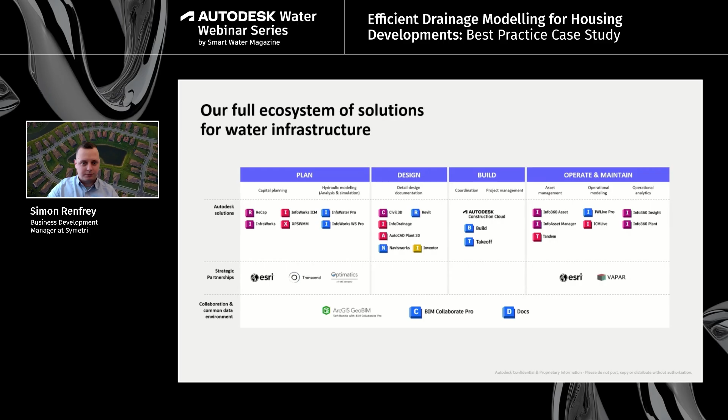So I'm now about to hand over to Brian, who's going to run through the case study and talk about how he handles challenges around having incomplete or poor quality site information, facing increasing planning and regulatory pressures, ensuring drainage designs are not overcomplicated, leading to inefficient modelling and wasted drainage design, reducing the reliance on spreadsheets with evidence-led and optimised drainage systems, ensuring accurate designs to reduce the likelihood of costly, oversized storage structures or unreliable and risk-heavy designs leading to increased flood risk, and finally, workflow and scalability challenges.

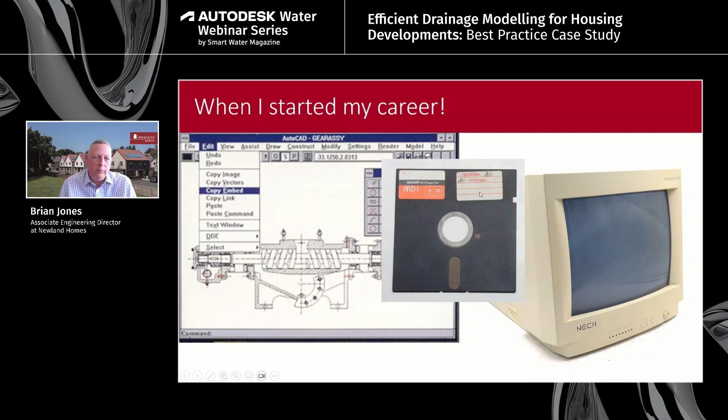So we've done that. Yeah, so when I started my career, screens were that big. AutoCAD was fairly basic, and we saved all our work on floppy disks. So I've been in the industry a while.

Newland Homes is proud to be the first house builder in the UK to sign up to the United Nations Climate Change Neutral Now pledge. We are building zero carbon homes and have been since 2022. And over those few years, we've built over 510 zero carbon homes.

Efficient drainage modelling for housing developments, best practice. If you're still using spreadsheets or struggling with overcomplicated drainage models on housing sites, with tighter sites and increasing planning pressures, inefficient drainage modelling can lead to unreliable results, inflated storage requirements, and wasted design time.

So I'm going to be covering in this seminar how we build efficient drainage models without unnecessary complexity, move beyond spreadsheets, which is where I started doing my drainage design many years ago, and how we integrate SuDS onto tight sites and avoid the pitfalls of increasing storage volumes and risk.

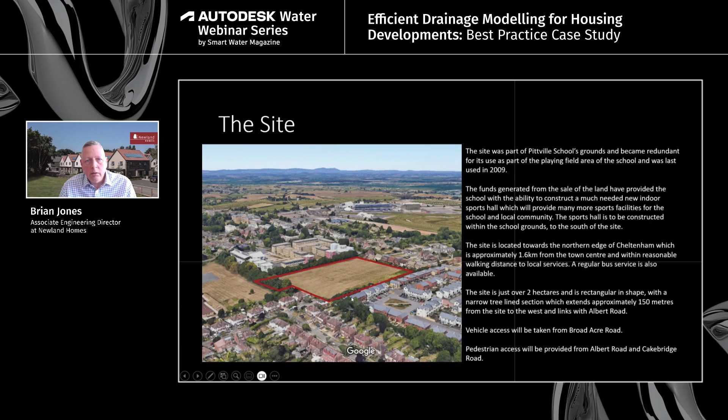So gathering the background information, part of that is getting the service record plans. So you can see from this, you've got existing sewers off to the south in what's called Cakebridge Road. There's also sewers off to the west beyond Gloucestershire College in Albert Road. And then the recently built development off to the east has got the green sewers in there, which haven't been adopted yet.

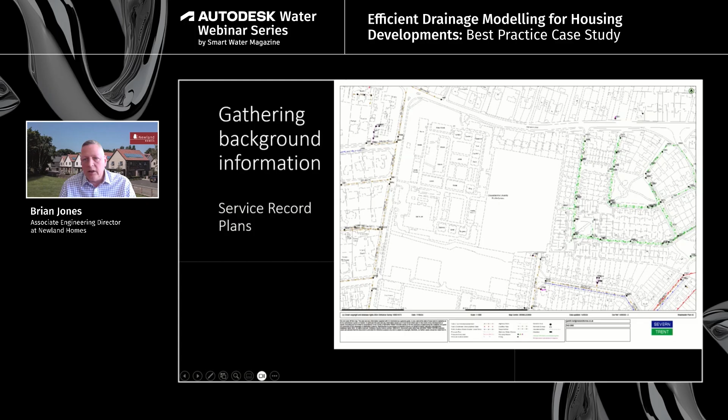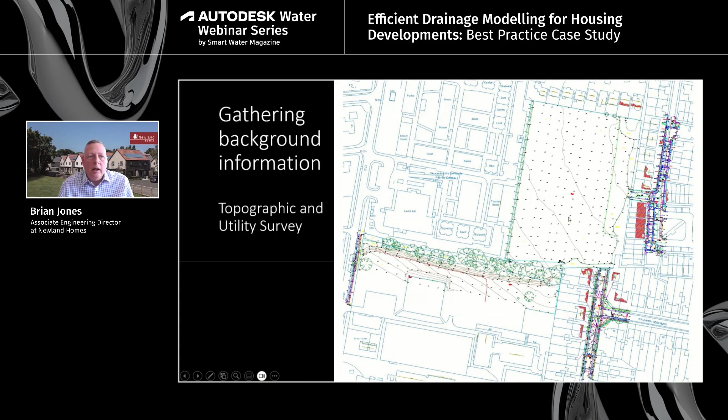So part of the information we gather is the topographic survey. That's useful in identifying utilities and existing services in detail, and the ground information. So we did percolation tests on the site, identified where the permeable soils might be, and tested at appropriate depths. Unfortunately, on this site, despite the fact there are some sands and gravels on the site, they were too dense to get a sufficient percolation rate for any permeability.

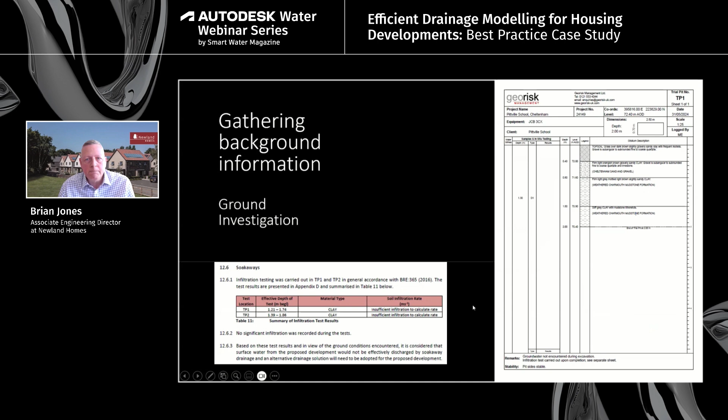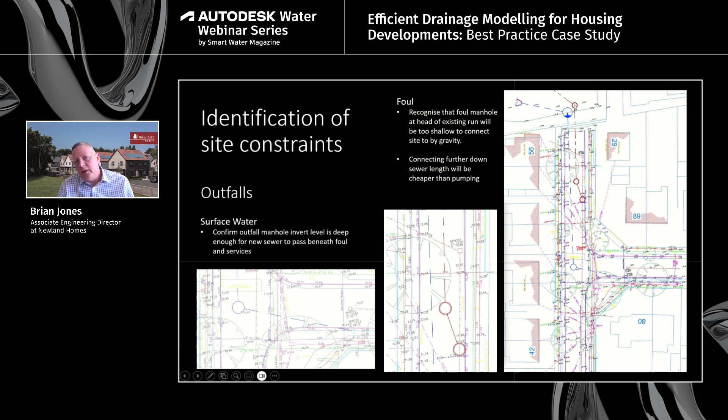So looking at the site survey in detail, we could identify the points of discharge. Looking down Cakebridge Road, there's a surface water sewer there at that point. And then a bit more detail on the left, you can see closely, there's a manhole there we can connect to. The foul drainage is slightly too shallow at the top end of the road, so we thought we'd need to take the sewer further down, so we can design both of those. And we can check that there aren't any services clashing because we've done a utility survey.

So the first part is to look at the site and establish a discharge rate into those existing sewers, assuming there aren't any capacity issues. So the first thing is to calculate the greenfield runoff rate. Now, the site was designed in April. It's not that long ago, but at the time, there were some inconsistencies between the LLFAs' approach on calculation of greenfield runoff rates: to use the site area or the impermeable area only.

Some LLFAs insist on just using the impermeable area, while others will let you use the total site, but insist on increasing the CV value for your calculations from 0.84 to 1, or including the green areas, the permeable areas, if you like, as an allowance in your runoff calculations. Since then, the national SuDS standards have been issued and clarified the process, using the total site area and not increasing the CV value.

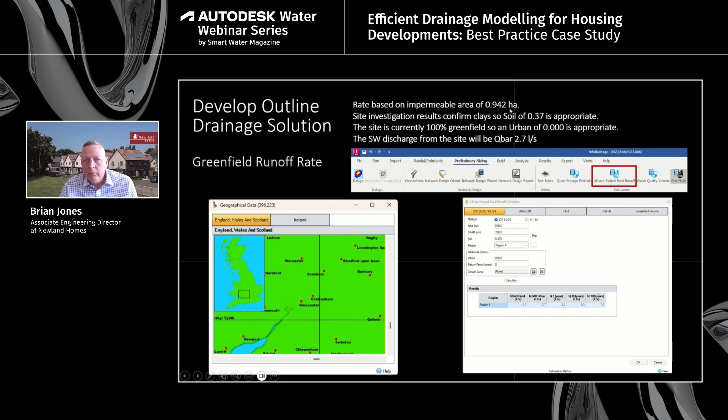You need to select the region, so make sure that the region's in the right area. But from that, you can easily calculate your rural runoff and your Q-bar value to estimate your storage. So the site area for this site was 0.942 hectares. So from there, you can do a quick storage estimate using the tab to the left.

Pop in your site area and again your discharge rate and do a quick calc, and it comes up with a range of volumes for your storage. So taking somewhere in the middle of that volume, because we know we're adding some SuDS, so this is probably going to be an overestimate of what we need. We can plot a pond or an attenuation feature that is an appropriate depth and area to give you that volume.

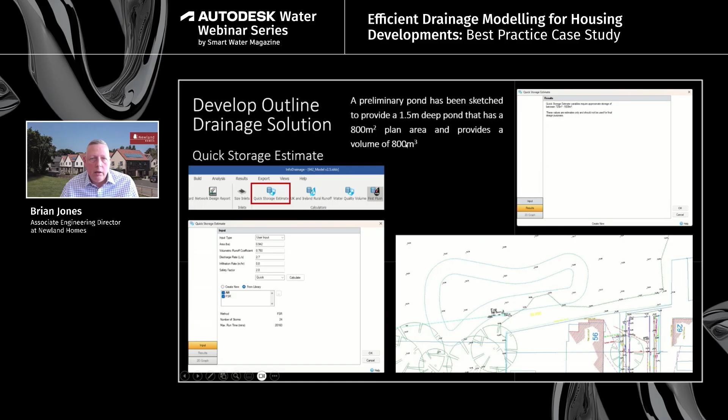So then passing that back to our architects, they came up with a layout for the site and how we were going to develop the site. As you can see, it's reasonably dense. Being in the middle of Cheltenham, there's very little open space. So the pond has been squeezed in to the bottom. Lots of houses running around a road system. That leaves very few options for SuDS.

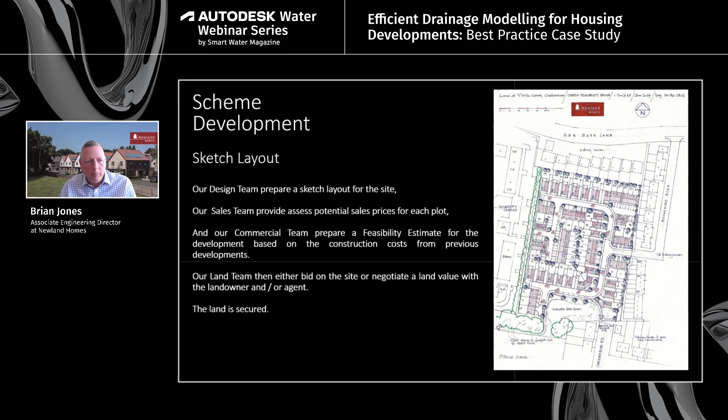So the design team prepare the sketch. Our sales team will then put house values to that sketch, and I'll add on a preliminary design for the drainage. Our commercial team will prepare a feasibility estimate for the development based on construction costs from previous developments, and then the land team will do a deal with the landowner to buy the land at an appropriate value, and the land is secured. So after we do that process, then we move on to the detailed design.

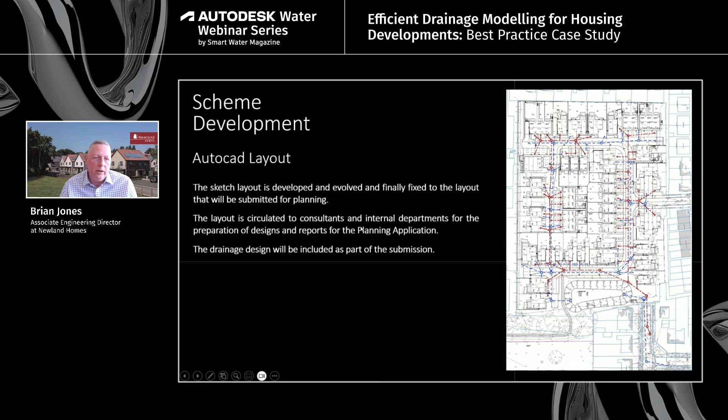So we'll CAD up the layout, detail the drainage in a lot more detail to make sure it all works. Draw it all out on AutoCAD and then pass it over onto InfoDrainage. So in InfoDrainage, once you've drawn it, you can import surface data from any 3D ground modeling software that you might have. Various formats for doing that: PWF or directly from a 3D CAD file, or you can load it from a surface model.

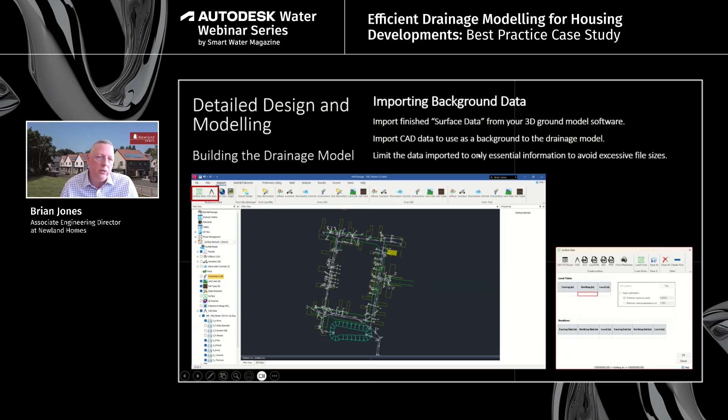But be careful how much data you do import into InfoDrainage. Only import what you really need, because the file sizes can increase quite rapidly if you import everything, especially on larger sites. So it's important to limit the CAD data that you import. Remember, it's a model; you're not trying to replicate reality.

So likewise you can import the drainage design. If you've done one in MicroDrainage, you can import that. If you've just prepared the lines on CAD, you can import those. So if you're importing the lines in CAD, you trace over it. If it's from MicroDrainage, it'll come with all the levels and everything brought in like this. This is an example of an imported design from CAD.

You can see the surface water lines, and any ponds or other features that are imported from MicroDrainage will appear as a square box typically. If you're tracing over and drawing your own network, there is a snap tool to allow you to snap to manholes, etc. on your imported CAD layout.

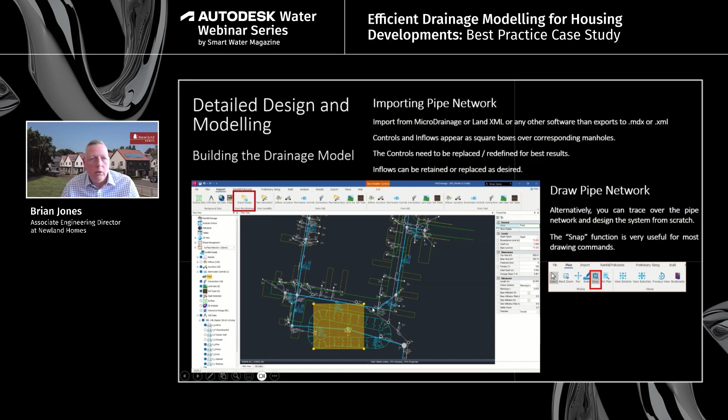So the next step is to add your pond. So again, you can import the outline for the pond from AutoCAD, or whatever other control that you want to use as your main storage. Ensure that any polylines in CAD are closed and that all arcs are removed, because InfoDrainage doesn't like importing arcs at the moment. So there are various apps that you can add into your AutoCAD to convert arcs to segments to sort that out, rather than breaking them all up yourself.

So you go to import, go to Stormwater Control, and then select your layer. So make sure each device type is on its own layer. So if I'm importing that pond, now that would import both of those lines. So if I simply wanted the top or the bottom of the pond to be imported, because if I import both, if I bring it in with them both complete and without arcs, then it'll bring me in 2 ponds. So one of those lines I should probably break so that it's not a complete polyline, and then it'll just import one of the lines. I'd usually do the bottom.

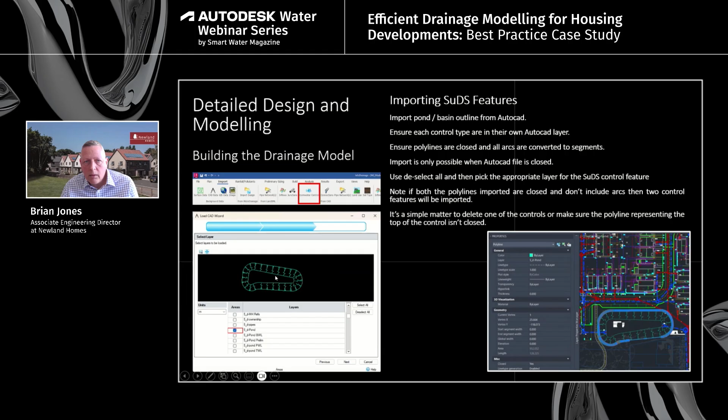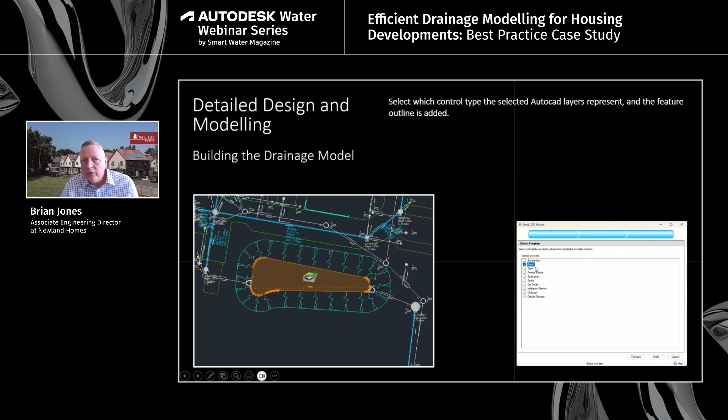So it brings in the bottom of your pond, and then you select pond when it comes in, what type. So you tell it what type it is, and then you can define the parameters of that pond. So the depth and the area at the bottom, area at the top, and your levels. And then you need to go on to your advanced tab as well and give it a Manning's value so that it actually models the path of the water across the base of your pond or basin, depending on what it is. And you can define any infiltration rates if it's an infiltration basin.

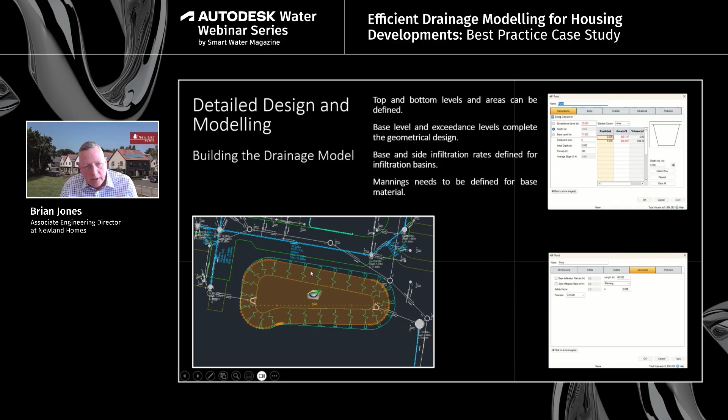So when you've done that, you'll notice that those 2 pipe lengths are missing, going to the inlet and your outlet. So we need to connect the system back up and define those 2 pipes to be the correct diameters that you need. So if you've got a previous pond in there, the square one, you can redefine your outline to suit something that's imported, but I tend to delete them and reset them.

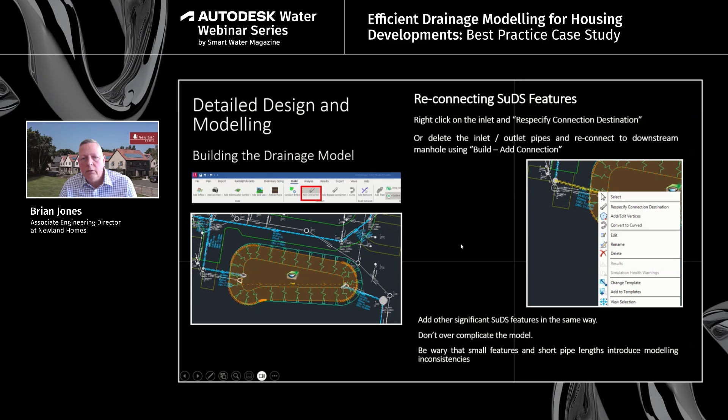You can add any other significant SuDS features in the same way, but don't overcomplicate the model. Be wary that small pipes or short pipes and small manholes can introduce modeling inconsistencies. So if you try to replicate real life too much, you'll introduce spikes in your hydrographs, and it doesn't generate decent modeling.

So now we've got the pipe structure and the pond in place, we need to bring in your impermeable areas. If you've imported inflows from MicroDrainage, they will be square boxes over each manhole or each node. I tend to import them from AutoCAD, so I draw polylines around each of my different impermeable areas, my houses and my drives. There are other ways to do it these days, but I've not picked up on those yet. Again, make sure the polylines are closed and all the arcs are converted to segments. Alternatively, you can draw them manually, but that's quite time consuming and cumbersome. So I tend to import them where we can.

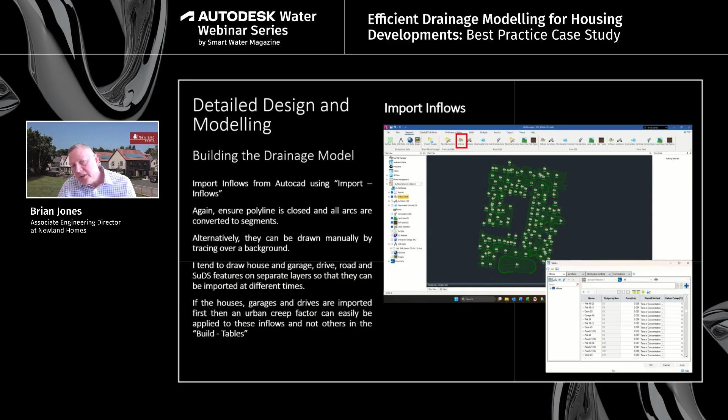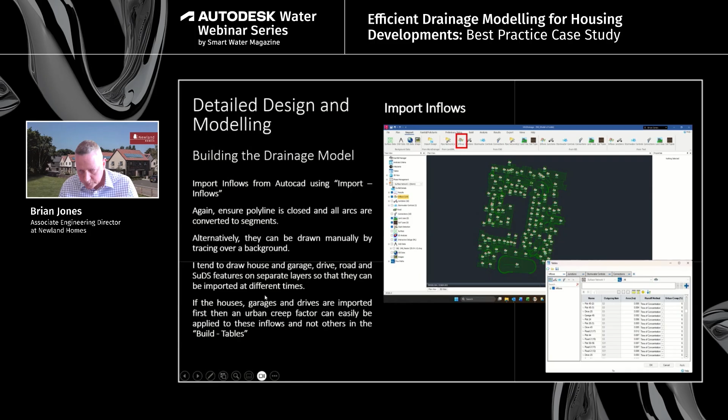So once you've imported your flows, you need to make sure they're connected to the right place. They will automatically snap to the nearest manhole if it's within the curtilage of the impermeable area or within the boundary. So not all of them will connect, and they won't necessarily connect to where you want them to. So you need to go around and reconnect the inflows, using the connect inflows button on the build.

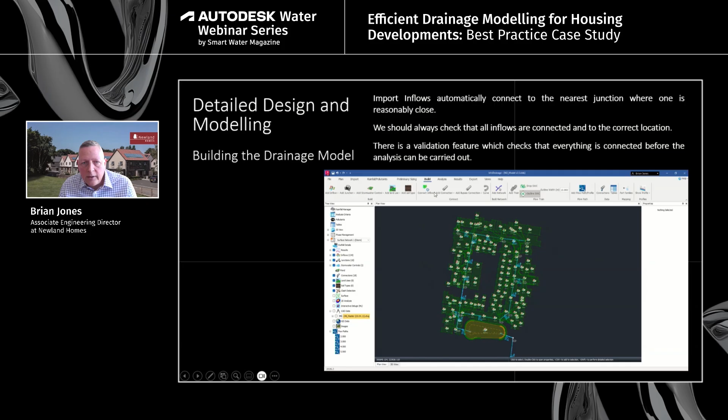So then we need to add the control manhole. So you select the control manhole, you can double click or right click on it, and add the Hydro-Brake. So if you go to outlets on your menu and then select Hydro-Brake from your outlet type, there's other options available, but Hydro-Brake is what we tend to use. And then you can define your design terms and click calculate. And then it'll contact the Hydro International website and bring up the Hydro-Brake details. Takes a minute or so, and then click OK, and that will fix your Hydro-Brake.

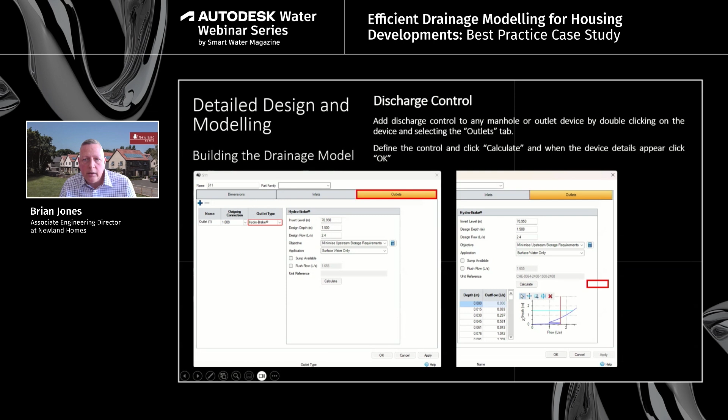Designing the sewers, you can select each of the items individually to define what appears on the sides. It might just be the name of the pipe initially, but using the property settings, you can define what appears there, and the display settings let you change the text size and icon size, since they can be far too large depending on the size of your site and the detail you want.

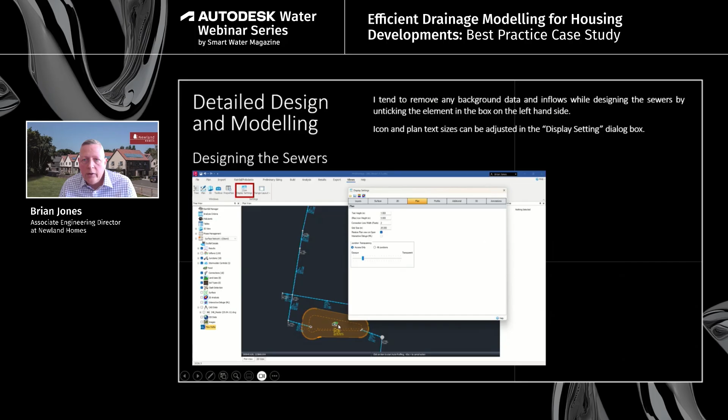There's the properties box that goes along with the pond, and you tick the items you want to appear on the left-hand side of that box.

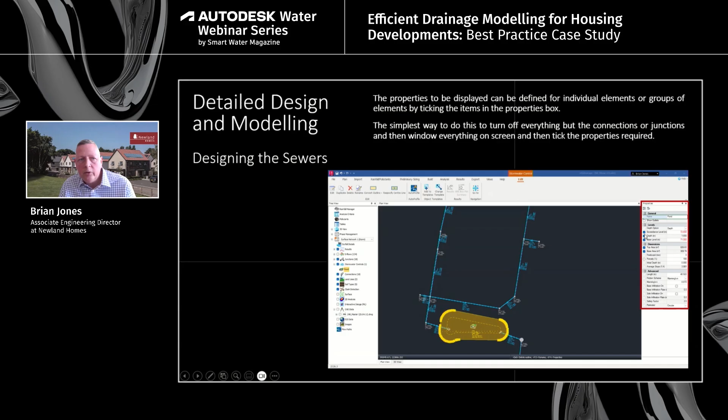You can create profiles running through each of the sewers. If you go to flow paths on the bottom left-hand corner and click auto profile outfalls, it'll automatically create a profile for each end of your design network, starting at each end and ending at the outfall. Then you can present the profiles like so.

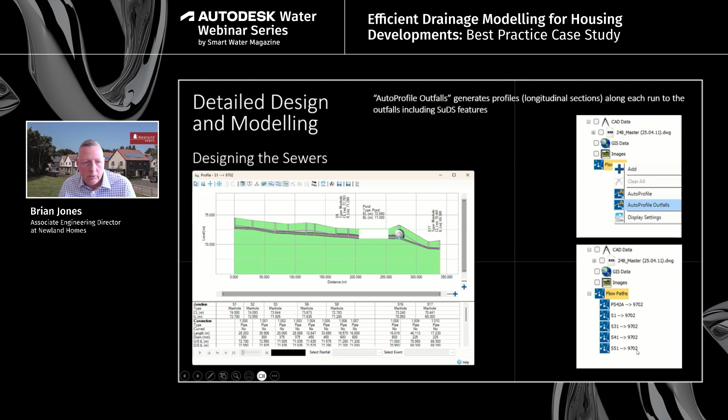We can apply a renumber, renumber the scheme. So you can apply a numbering scheme and it'll rename the pipes and renumber the manholes for you in whichever method you want.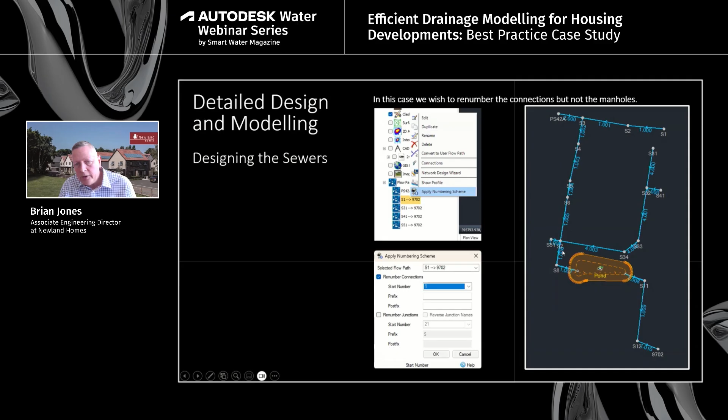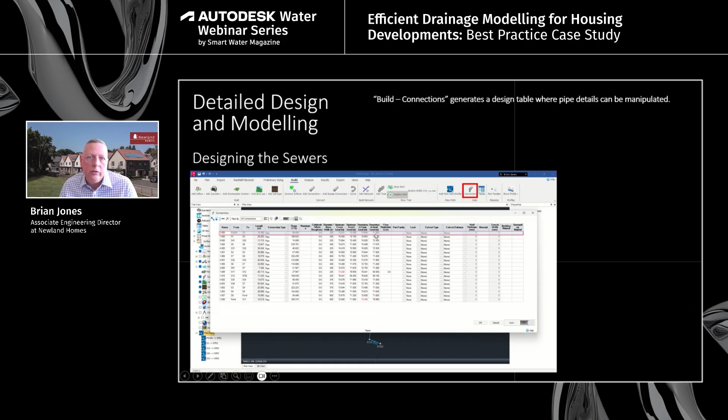The build connections box allows you to bring up the network. It shows you the connection type, pipe lengths, and defines the network, and you can change the invert and cover levels easily through doing that, and alter your levels as needed.

If you click that button at the top on the left hand side, the branches will appear in hierarchical order so you can display it in a way that's more akin to what you might be used to on MicroDrainage, in order of the pipes. Naturally it appears in a fairly random order - actually, I think it's the order in which you drew them, so not necessarily the order you want.

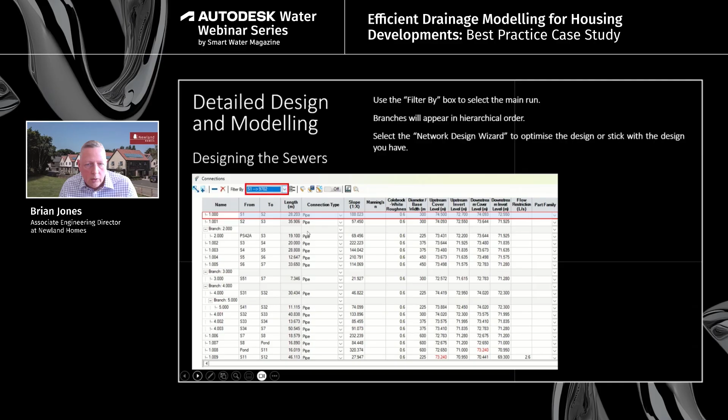So let's go back again a minute. If you click on the network design wizard next to that, you can automatically design your sewers. If we leave it to do the design itself and just fix the outfall like that, it'll resize all the pipes and change all the invert levels according to our design characteristics or design criteria.

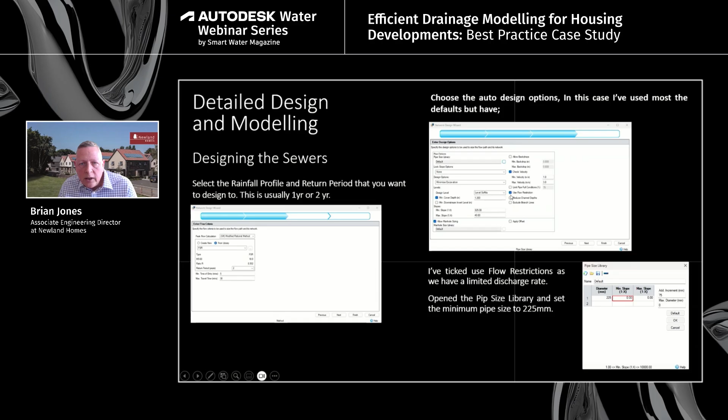So if we pick FSR and the return period, and we want to use the flow restriction, we click the flow restriction, and then change the default pipe sizes so the minimum is 225. Then we'll end up with a redesign that minimizes the pipe sizes. Some of these are a lot smaller than they were shown previously on my initial quick design. The changes are highlighted in yellow - it's changed all the levels and changed the slopes.

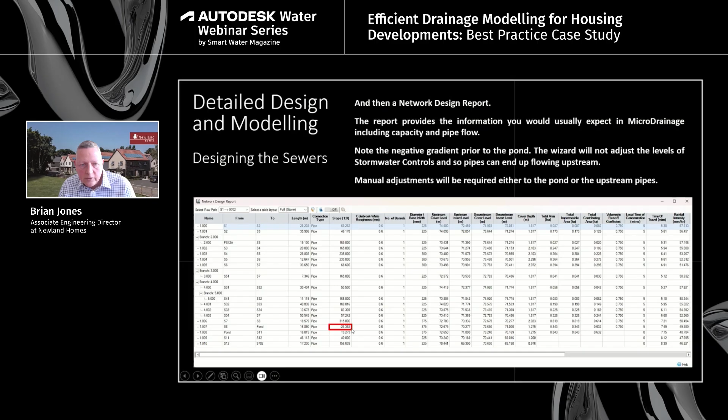Notably, it doesn't change the ponds or the SuDS features. So you'll notice at the bottom you end up with a negative gradient, trying to make it flow uphill into the pond, which obviously is not what we want. It's also dropped the hydrobrake, so it's not in line with the level of the pond.

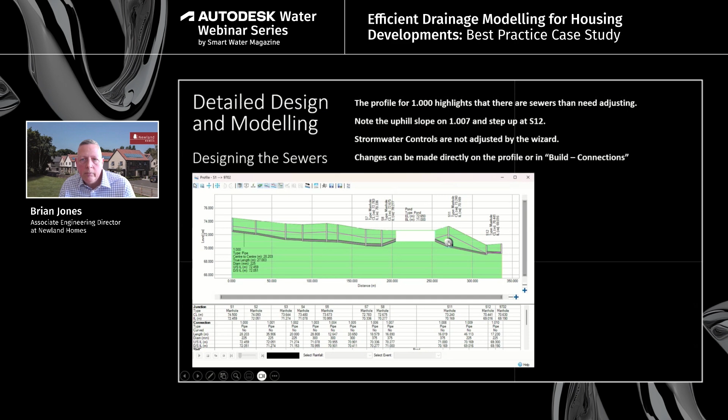So you can use the build connections to alter it manually and reset the levels to something that works for you.

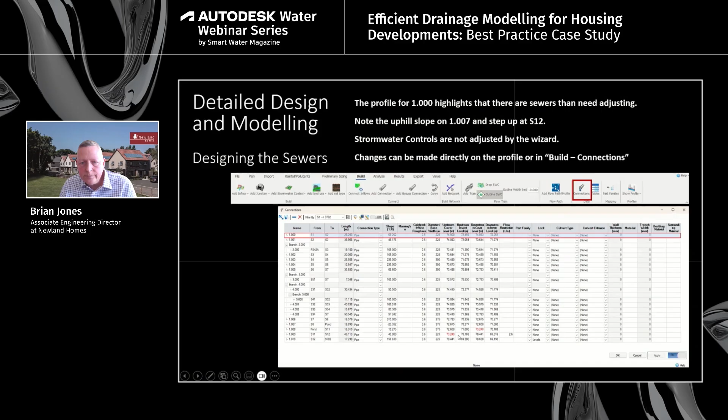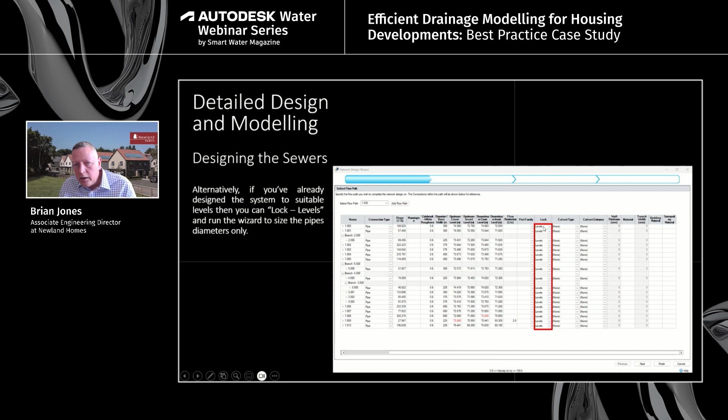But the way I prefer to do it is when we're doing the design in the first place, the network wizard in the first place - if you do a design that is sensible initially in terms of levels, and you lock all the levels on all the pipes, then it doesn't change any of the levels, it just changes the pipe sizes to suit.

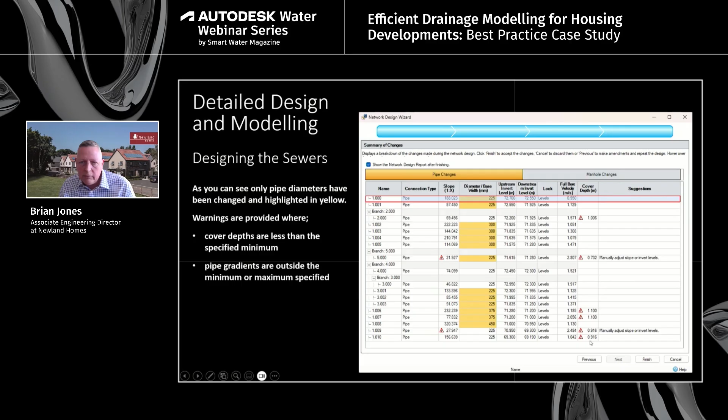Now some of these pipes are a bit bigger than they were on the last one, but at least the design is sensible, and it warns you where you've got covers that are below your minimum criteria. I mean, 732 is a bit low, but the others are fine with a bit of concrete protection.

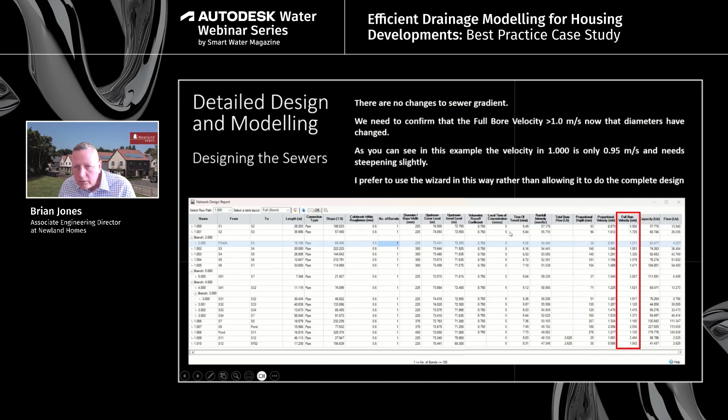So then you get a network that has gradients that work for you. You need to check the velocity - minimum velocity on a surface water pipe should be more than 1, which in this case, one of the pipes is too flat, so we'll need to steepen that, but we're not far off. Your design will look a bit more sensible like that.

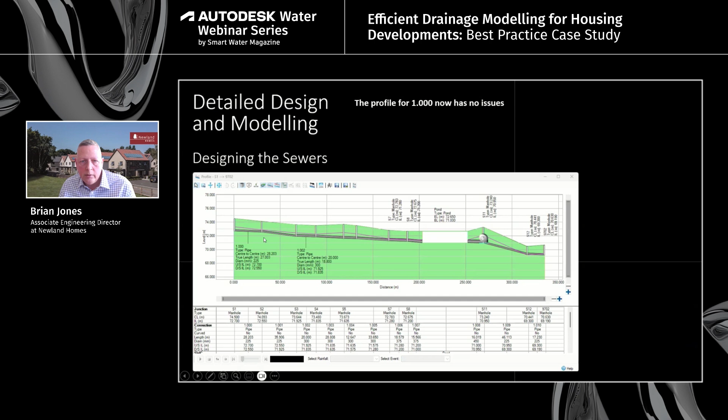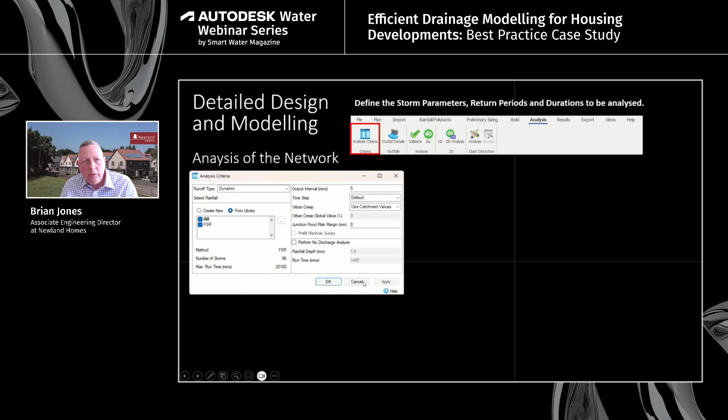So the next step is to model that pipe network for the storms. We can do that easily in the analysis criteria - you've got your storm definitions in there. You can define your parameters, your return periods, and your storm durations. The defaults are selected there, but you can set whichever ones you want.

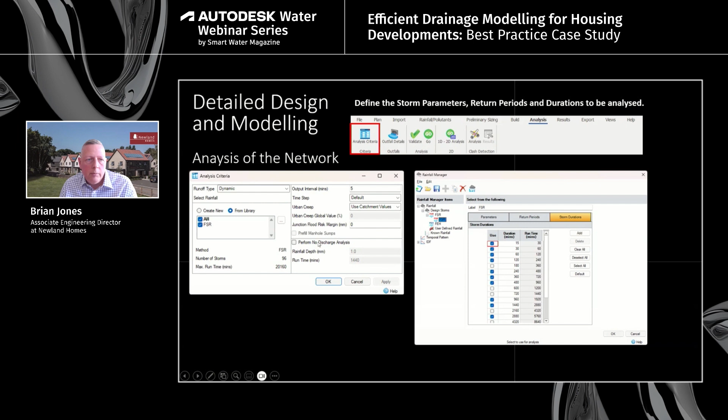Before we run the analysis, there's a validation that the software runs. It makes sure everything is connected, if you like, and all the parameters are set. It doesn't necessarily mean they're connected in the right way - it identifies any unconnected inlets and outlets, any unconnected inflows, unconnected controls, or missing design parameters. It doesn't validate your design, doesn't check for poor design, doesn't check for uphill gradients, doesn't check that you've connected inflows to the wrong location. So you still need to be pretty careful what you're doing.

Once you've sorted out all the issues, which you can do by clicking on those individual items that are highlighted, you can click on these items and it'll take you to the right place to correct them.

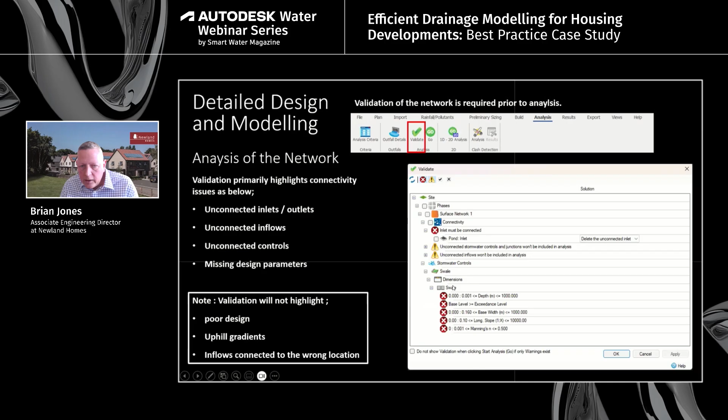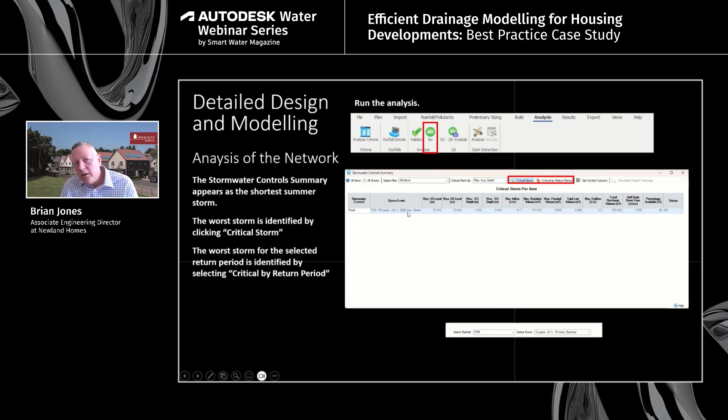Once it's validated, you can click go and run the analysis, and it'll tell you how much capacity you have in your pond. If you click on critical storm, it'll bring on the worst storm, which is this 100-year storm.

2,880 minutes, and tells you there's 20% capacity. If you click on critical by return period, it brings up the storm that you have selected. In this case, it's the 2 years, worst case for this 2-year storm.

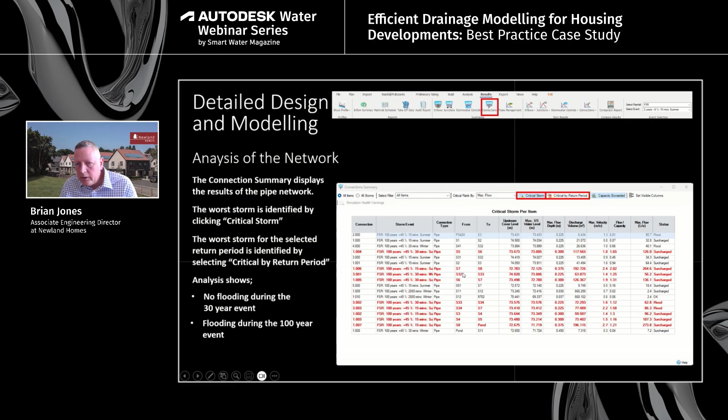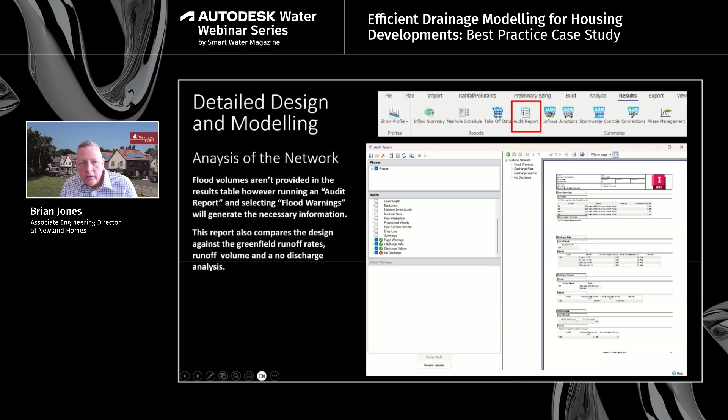You can analyze the network and the results you've got by doing an audit report. If we select flood warnings, as well as discharge rate and discharge volume, and run that, it will give you some results from the system. We can see where the flooding volume is, where the flooding is, and what volume we need to deal with or retain on site.

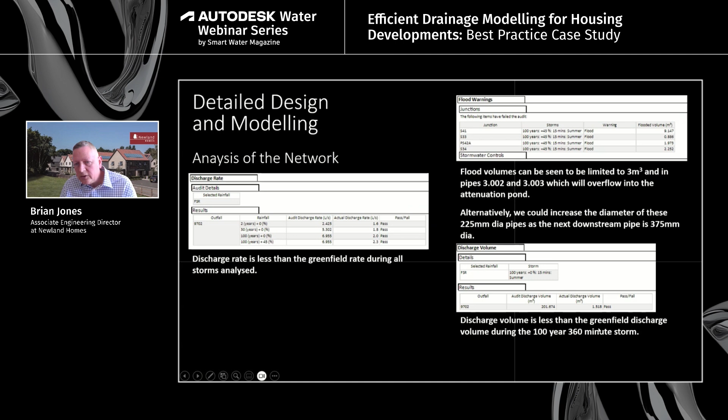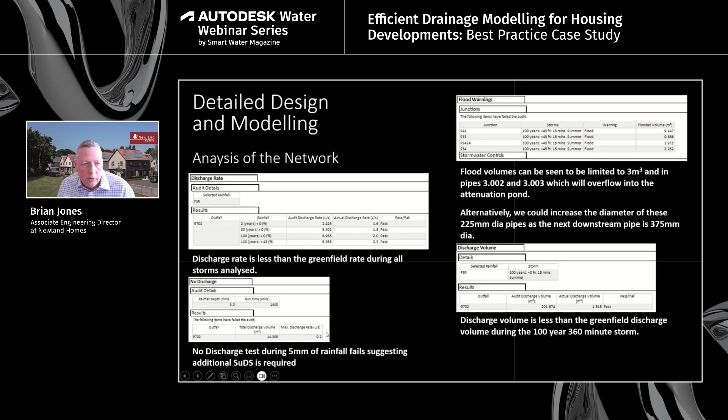Checking the discharge rate, we can see the actual discharge is less than all the control discharges we had in our greenfield runoff calcs. You can check the discharge volume against the 100-year, 360-minute storm - see that passes. And you can check it against the runoff, the 5 mil runoff rate. You can see this fails, which isn't surprising because we've got no SuDS in there and no percolation.

So once we'd finished that design and submitted for planning, the planning process changed the layout that we had. Rather than connecting down into Cambridge Road, we ended up having to run a sewer along through the trees into an existing ditch on the west by Albert Road. So the design changed.

It wasn't too much of an effort to swap the pond ends round and connect everything in. We needed to redo the model, and we added in some SuDS features. If we go back to the detailed design, you can see the green areas are small swales that we've managed to squeeze in to try and introduce some SuDS into the scheme.

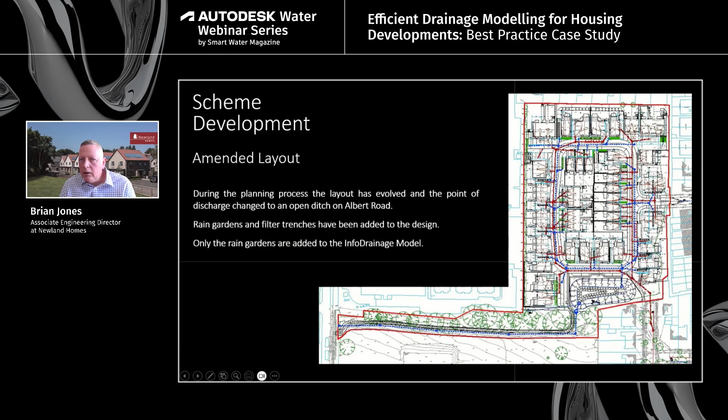There are some filter trenches in some of the driveways as well to do the same thing. So we've added the swales in. As you can see, I've not modelled every single pipe - I've just connected the end of the swale to the nearest manhole, rather than breaking the pipe up into lots of little bits with branches at each connection. You've got to remember it's a model and not actual - if you put too much in there, you'll have too many short pipes and the modelling can become unstable.

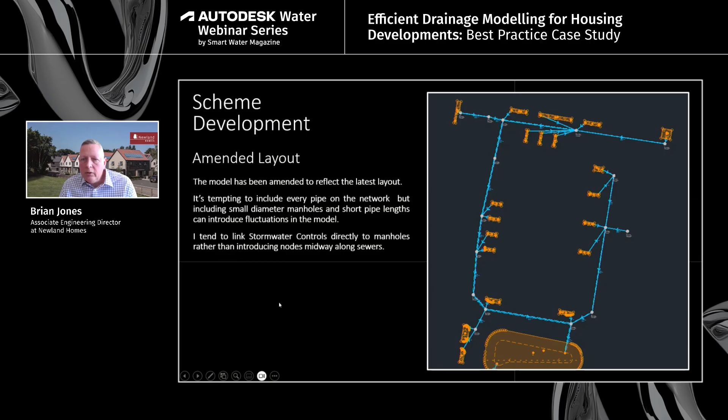So if we run the new scheme again, you can see that all the swales have got capacity, and the pond is as well. That scheme's a little denser, so there's a bigger impermeable area, so the capacity in the pond has gone down despite the fact we've got all those swales. Modelling the pipes as well, we can see that there's no flooding in that system.

So for the amended layout, we run the wizard again as before, and we reduce the pipe diameters throughout.

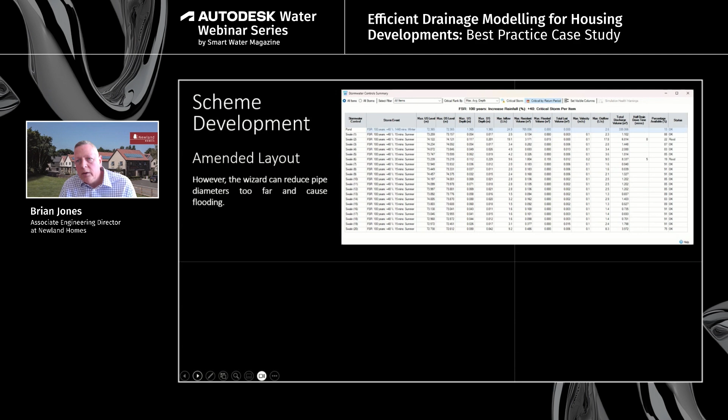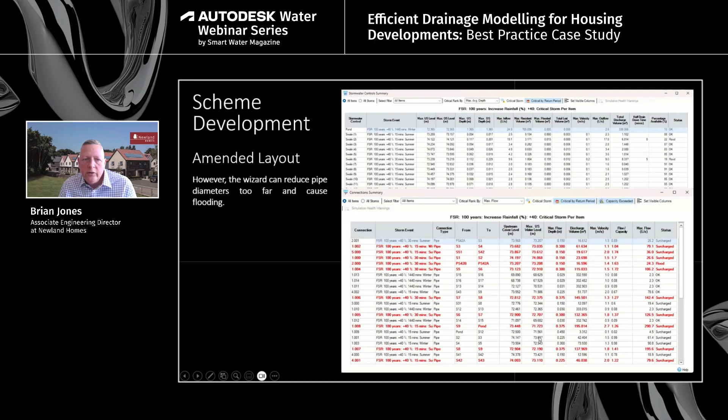When we were running that model, you might notice that some of these pipe diameters are quite small, 225s. You can reduce them too much by doing the pipe size reduction while you've got the swales in there, because when you model those storms, you'll end up with more flooding and cause yourself more problems. So we need to run through and increase some of the pipes to make them bigger.

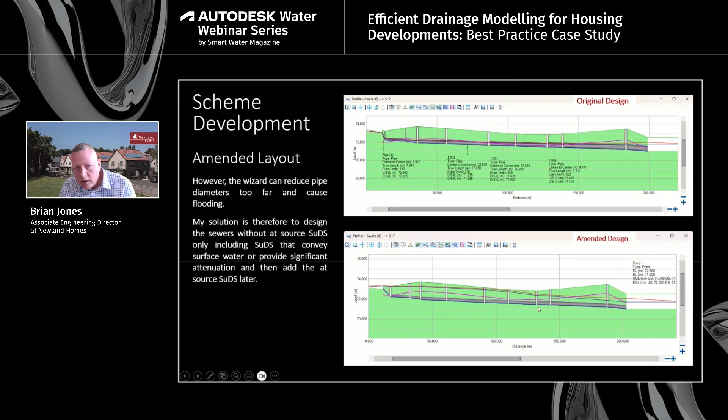So to conclude, we've identified the most suitable point of discharge, calculated the greenfield runoff rate, determined the required size of the main attenuation feature, designed the main sewer network, used the wizard to optimize the pipe sizes, analyzed the network to ensure it complies with the design requirements, and added SuDS features that are provided at source.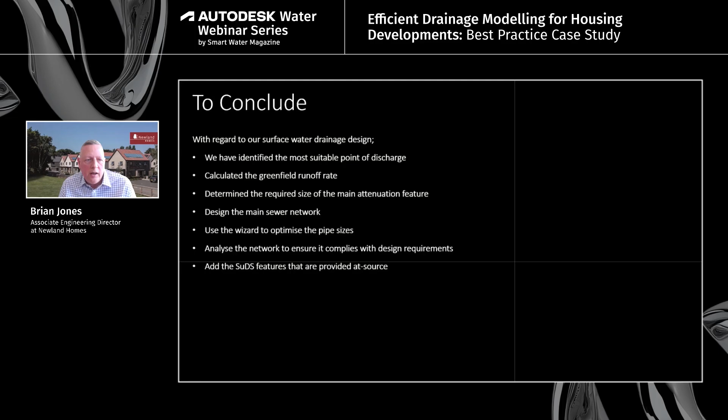Thank you so much, Brian and Simon, for your insightful presentations. We've seen how shifting from manual spreadsheets to more scalable integrated workflows can transform drainage modeling, especially in managing planning pressures and tight site constraints. The Pittville case study has given us a clearer understanding of how to effectively balance SuDS integration with cost-efficient design to achieve practical real-world outcomes.